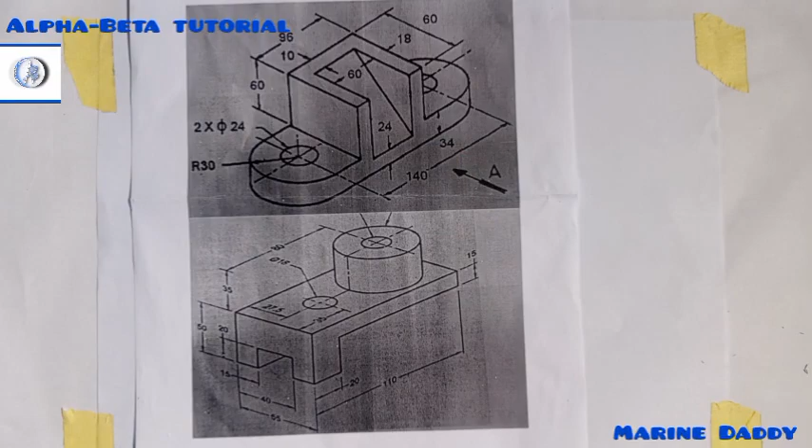Alright, now this is another question among your assignments. They ask you guys to draw the isometric drawing of this diagram, so I'll be guiding you through on how to construct them.

Let's go. First thing you need to do: isometric drawing is a kind of drawing drawn at an angle of 30 degrees to the horizontal, isn't it? So we'll draw our vertical and horizontal lines. This is my vertical, this is my horizontal line, and this is my vertical line.

That's what I normally teach my students. I have my 8 and my 10. If you want to draw a perpendicular line, balance the horizontal or the vertical as the case may be to fit in this extended part of the 8 in inches and the 10 in millimeter or centimeter rather. Balance it in this manner, then you draw.

So at this place I'm having my vertical line. What I'll do is project up, right? I'll go from this side and draw my slanted lines. They said it's drawn at an angle of 30 degrees to the horizontal.

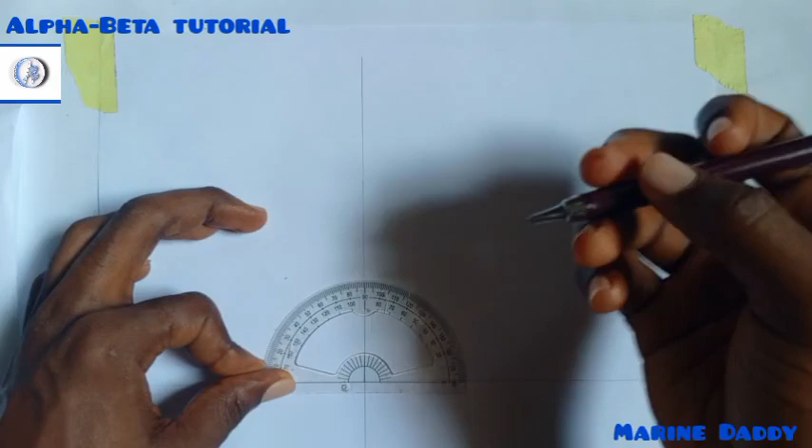So I'll get my 30 degrees. You can use your set square to get it, but I am very much comfortable with this one. So welcome to the party if you love this. I'll project out. Same thing applies to this side, I'm projecting out.

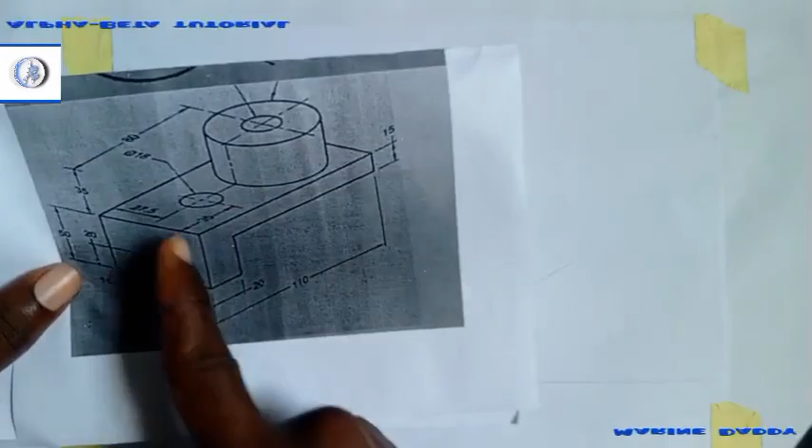Once I'm done with this, I can now start my construction. Isometric drawing gives you the opportunity to start from any part of the diagram. The choice is yours. I can choose to start from here and end up getting the diagram, or start here, whichever way is convenient for you. But I usually recommend you start from the bottom, the ending part, then move upwards.

You understand? So let's go from this part. I have this part of the diagram going like this. The total is 55, so this is what I'll do to get speed. I'll measure 55, so this is 55 here. Indicate 55 there.

I also have 15 millimeter at this side, so I'll measure 15 here. Here to here is 15, here to here is also 15, I guess. So I'll measure 15 here. This is also 15, you understand?

So the next thing I'll do is draw a straight line. Balance 8 and 10, then project it out. You can also use this one, you can also use this.

When I was teaching isometric drawing, I taught them how to use different means to get your lines. So you can also use this. You want to transfer this part of the stuff out to this one. All you have to do is balance it like this.

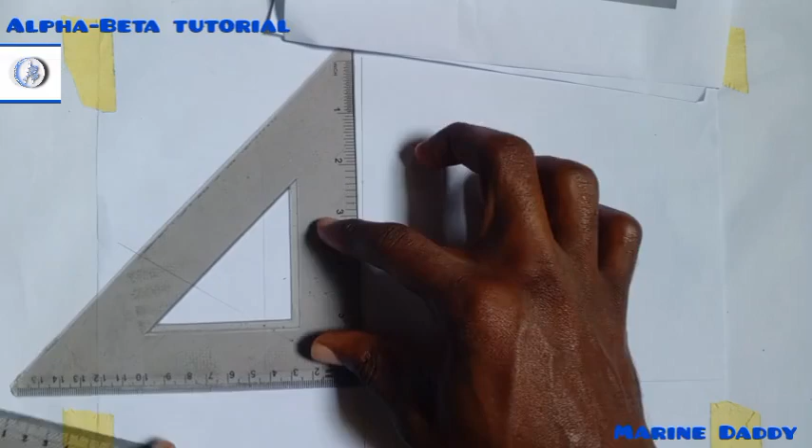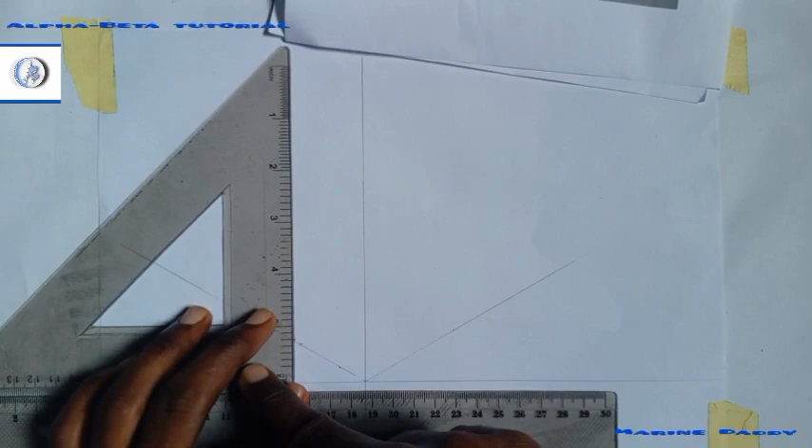Once you balance it like this, you can now move. As you can see, I arrived at the actual part, right? You can come to this side, I'll do the same thing. Come to this side, so I'll do the same thing. Right? So the choice is yours.

You can pick any one that is convenient for you, but I don't like spending time with these two, it slows me down. So I can just balance my 8 and 10 and work with it. So let's go.

Now, looking at this diagram, I have height from here to here, which is 50. I'll come here and indicate 50 here. Please, you can go and check out the videos to help you.

From here to here, I have 20. The diagram here to here is 20, so I will indicate 20 here too. Please come to this side and repeat the same process.

50 here, 20 here. Next thing I do is connect it and project out. Same thing applies to this, project out.

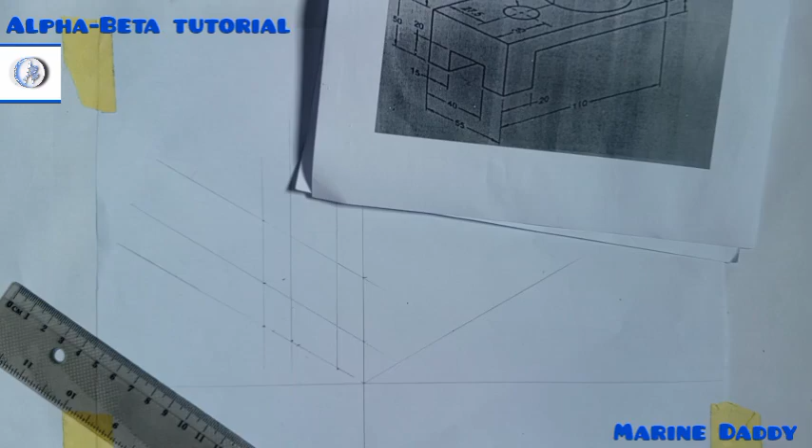So once I'm done with this, please pardon me, I'm having issues with my health actually, so my voice might not be audible enough, but I'll try my best actually.

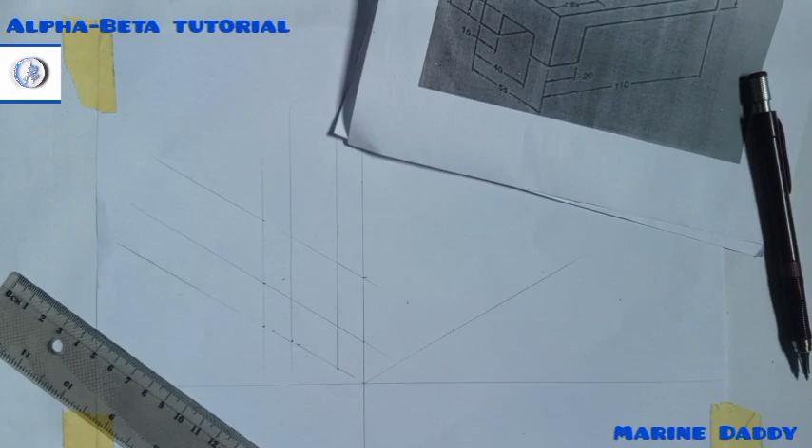So now that I have done this part, and you are sure that this side is actually correct, you can outline. For the sake of visibility, I'll make use of pen, blue and red pen. But normally, what you are supposed to use is your 2B pencil, or a thicker pencil that will enable you to show the work in a well outlined manner.

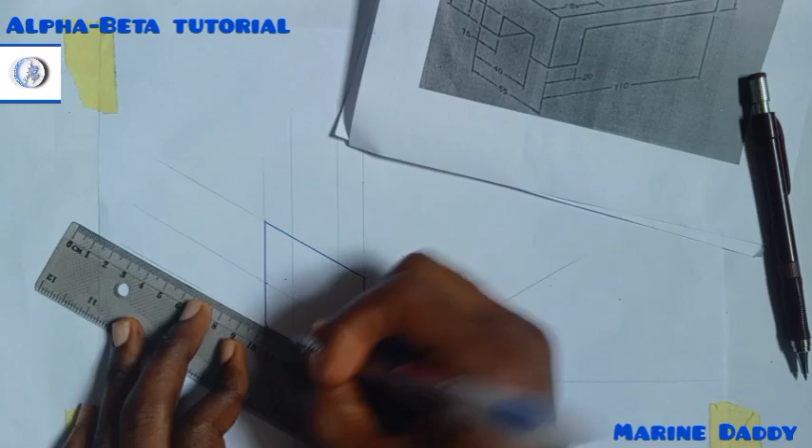I'll do it like this. So please don't use pen, no. You go use pen, don't say it's MD. You saw it in MD's video.

So I've done that part. Next thing I'm going to do is come to this other side, right? On this side of the diagram, I'm having 20 here, so I will indicate 20 at this side.

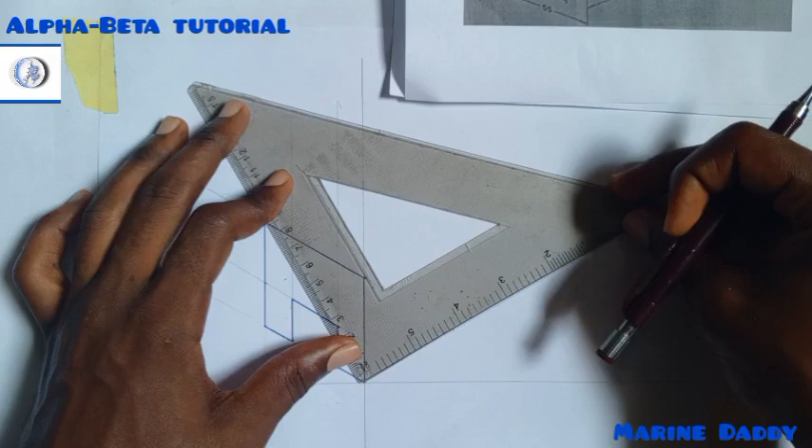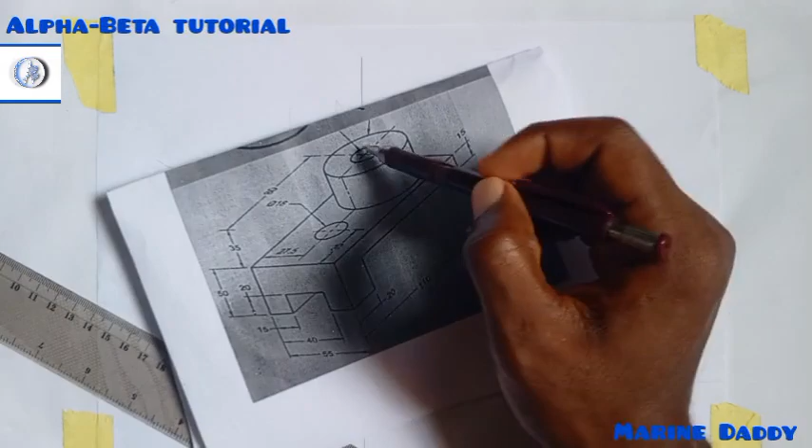Put the ruler in this manner, then take it up to this side. Project it out. Now the total length from here to this side is not given, but they gave us from this part of the diagram to this part to be 80. Now they gave us the diameter of this diagram.

Now once you are done with this part of the diagram, you can come over to this side. Isometric drawing gives you the opportunity to start from anywhere, so if you see that you are confused in a particular part, you can leave that side and go to the next place. So I'm moving over to the right side of this thing.

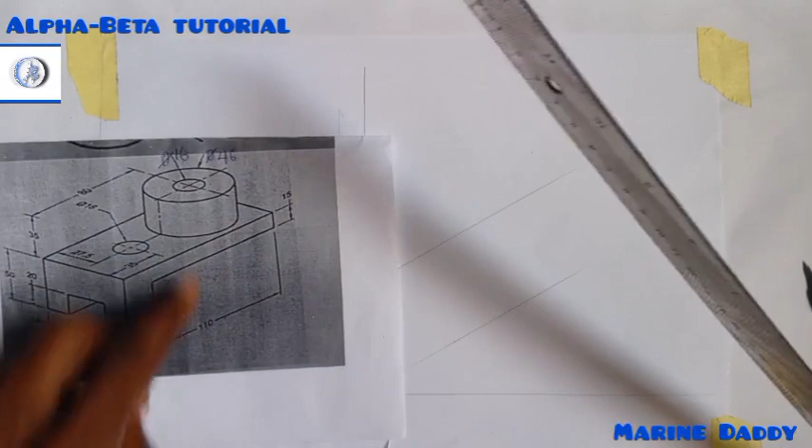Now I will measure the total from this place to this place, given to us as 110 millimeter. Here to here, 20. So I'll measure 110 and I'll measure 20 here. So this is my 20 here. Then I will now measure 110, that's 11 centimeter. I'll do the same thing here.

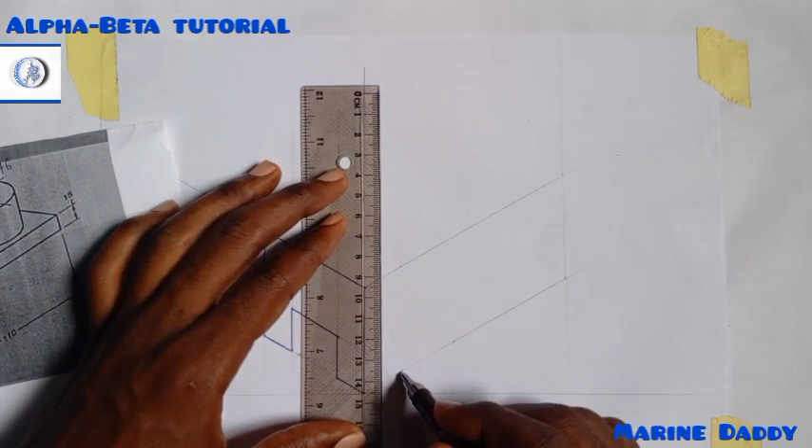I want to draw a straight line, and in my primary school they told me that the shortest distance between two points is a straight line, so I'll repeat the same process. So from here I'll draw a straight line. Now draw a straight line, do the same thing here, straight line. Now let's go.

They said this side of the diagram, here to here, it's 15, so I'll measure 15 here. Here to here 15, here to here 15.

Then I will draw. Always project, it's very important you project. Is it 15 or 10 they asked us to use? Okay, I'll use 10 instead of 15.

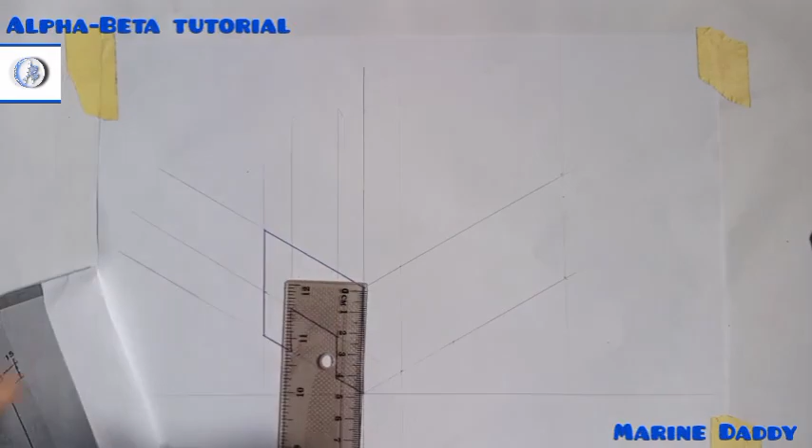Okay, after doing this part, from here to here, from our diagram, they said here to here is 15. So I'm measuring here to here 15. Now do the same process, here to here 15. So I'm connecting both of them together. Always project, it's very important.

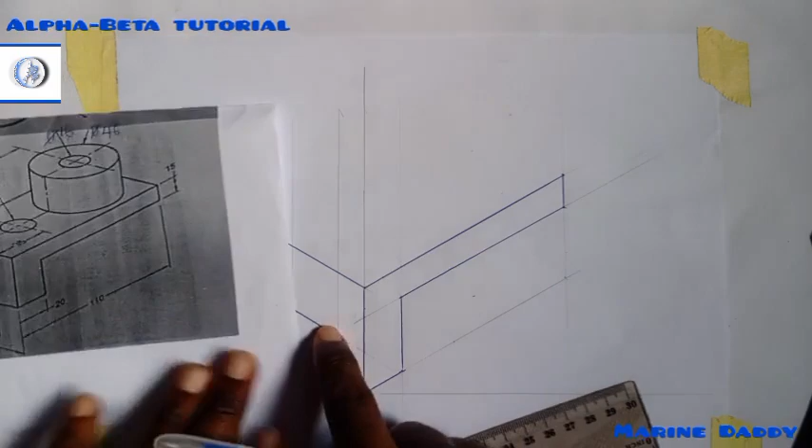So once I'm done, I can outline this side, and this side of the diagram. Please, this is for the sake of audibility, or visibility rather, that's why I'm doing this. Please don't use biro to draw. Okay, now the next thing I need to do, let me just close up this part. I'm having this here, so I need to indicate it here.

30 degrees to the horizontal, so I'll copy this one here. I'll copy it here. You don't just draw any slanted line, you copy it. So copy it, this is where it's located, and I'll draw it. I'm done with this side.

Now the next thing I have to do is to take care of the parts at the top. Now for me, I'm taking this to this side. This one, I'm taking it to this side. This side should be parallel to this, since they are 30 degrees to the horizontal, so I'll balance it like this.

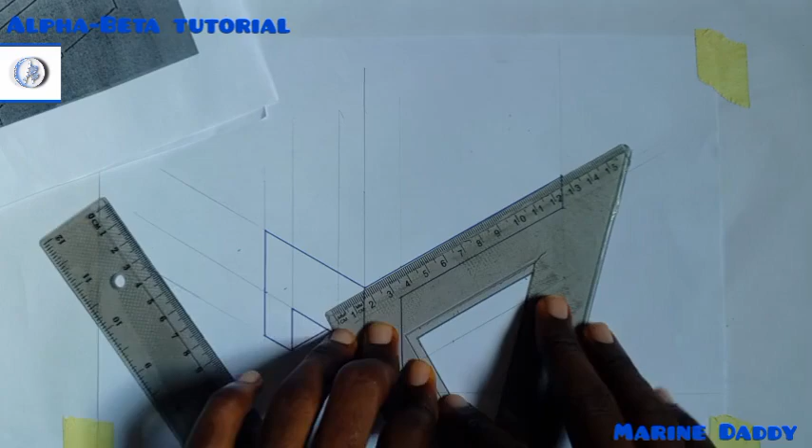Balance it like this to project.

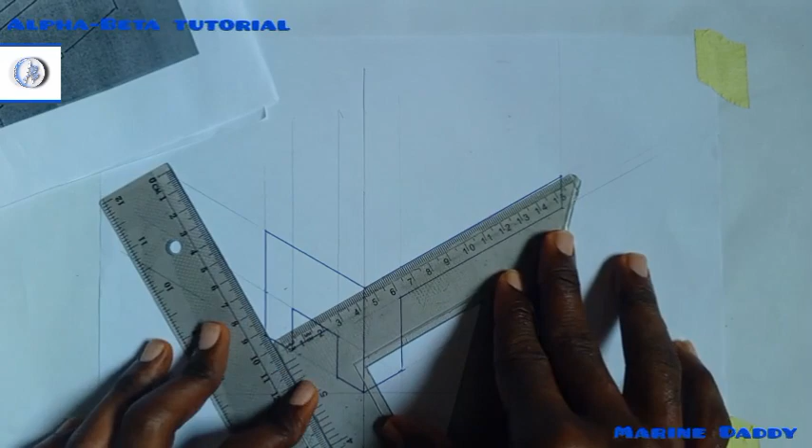If you've done it like this, you have to start measuring 30 degrees. Same thing applies to this side, I'll do the same thing here. So this side, I'm transferring it to this side because it's supposed to be parallel.

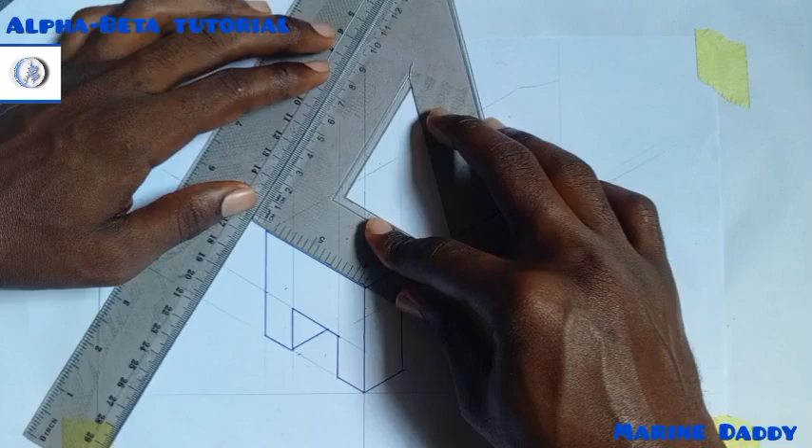If you don't want to do it like this, there are other ways for you to achieve it. So here it needs to be parallel with this, so I'm transferring it to this side. So draw.

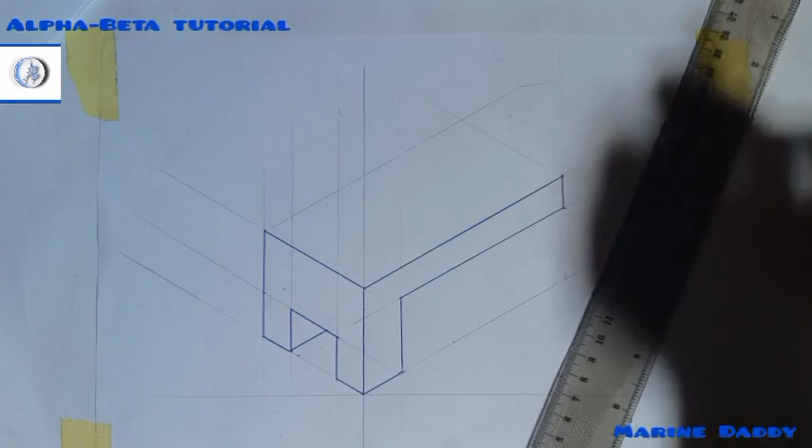Now instead of doing it like that, you can do it another way to minimize the usage of this. Since here to here is 110, then here to here should be 110. All you have to do is, when you draw a straight line, just measure 110, and you see I'm having 110 here. So that's the way to reduce the usage of that set square.

Now once we are done with this part, the next thing we need to take care of is the circular part at the top of the diagram. They give us the dimensions in diameter and radius, so we need to take care of them, and most especially their position at the top of this place.

So now let's go. In this diagram, if you look closely, from the center to this wall is given to us to be 35. Then from this same center to the other wall is given to us as 27.5. So I'll take care of that. Now this is what I'll do.

Watch closely, I want to get the location. Please, location is very important. Now from here to here, I'll measure 27.5. 25, 26, 27.5. Do the same thing here, 27.5. Once I'm done with that, I will draw a line.

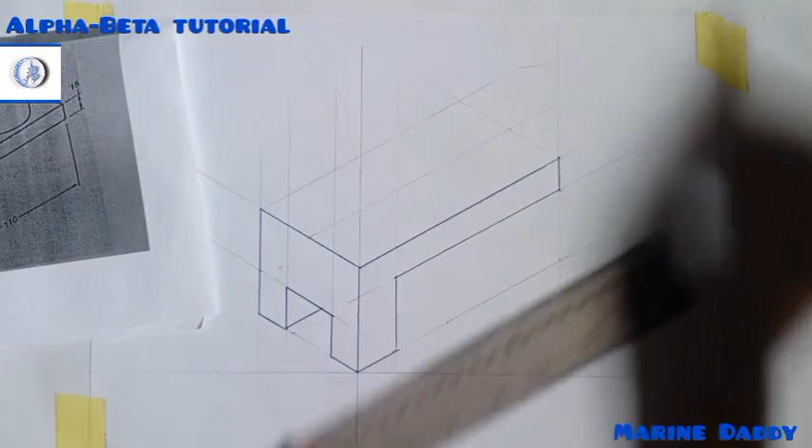Now they also told us that from this wall to the center is given to us as 35, so I'll measure 35 also. So 35 is at this side of the diagram.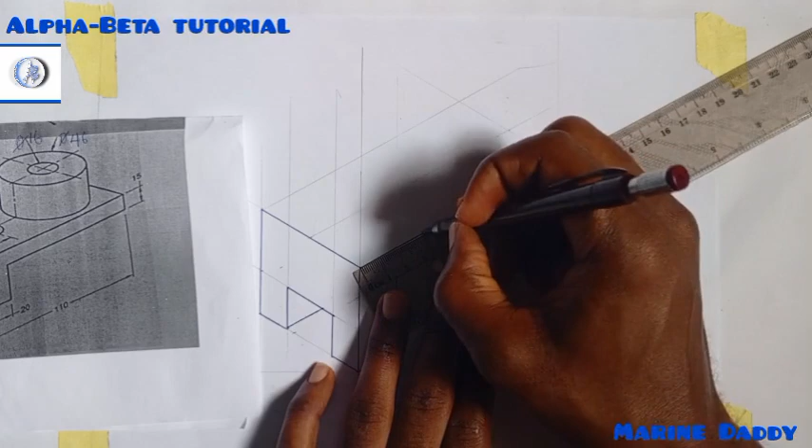35. Then here to 35. Once I'm done, I draw. Automatically this side becomes the center of my circle, so I have to create an isocircle at that place.

If you see that your work is getting too rough, you can clean off some parts, but not your whole construction. Please take note of that. So let's go from this center that we have gotten.

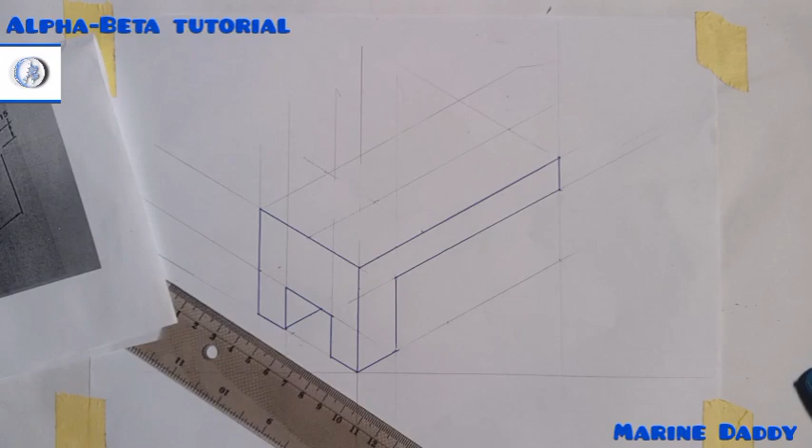We need to place the isocircle. You can watch my video to see how to construct isocircles, please, so I won't be wasting time there.

The isocircle, they tell us it's 16, diameter of 16. So this means I'll measure 16, that's from the center. I'll measure 8 to the right, 8 to the left, which gives me this 8 here, 8 here.

Repeat the same process here. I'm having 8 to the right, 8 to the right, and 8 to the left.

Once I'm done with that, I'll create a box. Not actually a box, a cube. So I'm balancing the cube. I gave you the different methods to do it, so pick your poison.

Just pick the one that is convenient for you, not actually your poison, please. Then this side, so same thing applies to this side. This and this.

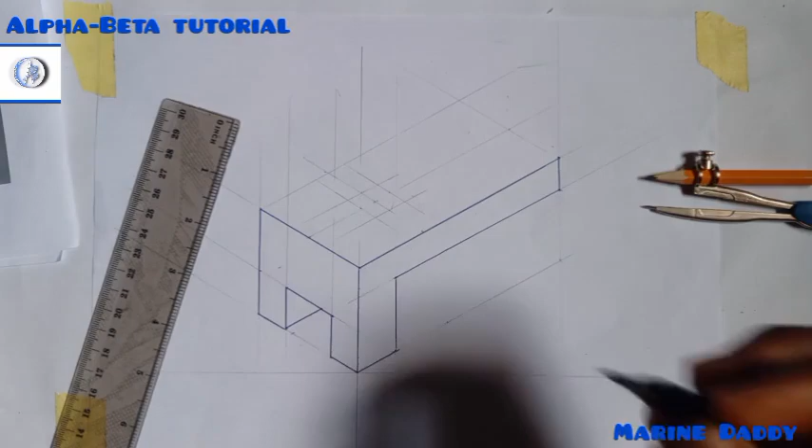After doing this, creating a parallelogram here. So what you have to do is this. From this top, I explained this in my previous videos. Go and check on how to construct isocircles, please.

So this place to this place to this. Reverse it. This.

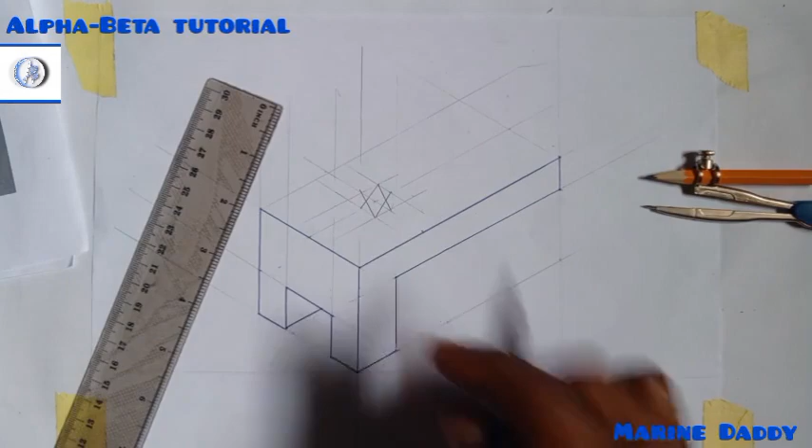Once you are done, you can now construct. This one comes from this side to this side. You can see. So this from here to this place, this side.

Then I'll repeat the same process here. You can see it's connecting to this side. Now for this part, I'll place the compass here. Then this one in this manner.

So after doing this and this, you end up having the iso circles. Based on what I've done, this is actually the way of constructing the isocircles.

This video is strictly based on your assignment, doing it for you, then guiding you through it, but not explaining some of the details in full. Please, if you want to understand how to construct an isocircle, locate the video. It should be among the rest of them. Then you can understand it and know how to do it.

Now, once I'm done, for the sake of learning again, I'll be using this to outline it with pen. So locate where I'm having my dimension, the actual one. I'm using this, I'll still repeat myself for the sake of learning.

For the sake of learning, I'll be using this. If you can get your hands on things like this, it helps you in your TD. It gives you speed and accuracy.

With this, I don't have to construct this isocircle, I just need to locate it. You can still approximate to get any of this circle and it will still work out for you.

Check out the videos where I did this, please take note of that. All right, let's go over to this other one.

So for this one, I'm having the circle, something like a cylinder located around here, so I'll need to construct it.

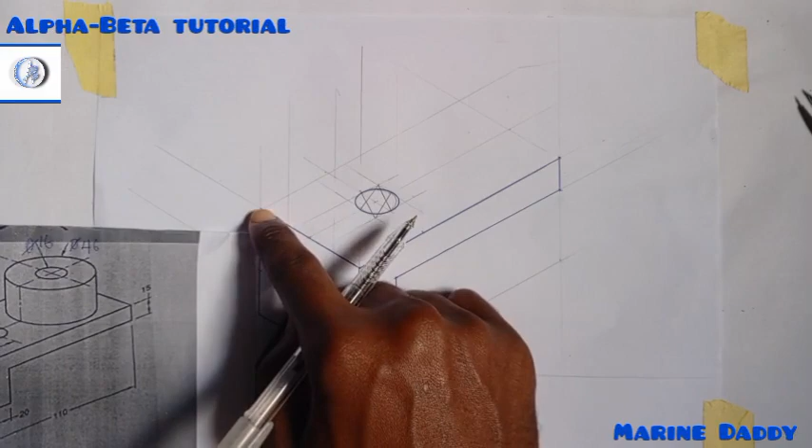And they told us that the center, from the center of the circle to this end here, they told us that it is 80 millimeters. See it, from this side to this side to the end, from the center to the end of this place is 80 millimeter.

So now what I need to do is construct it here. I'll locate my 80 millimeter. They say it's 80 from this place to the center. Say it's 80. Let's do the same process here to get a straight line.

Can you actually use your set square? Oh, I like working with only my ruler, it gives me speed. Now this place I'll just draw it here.

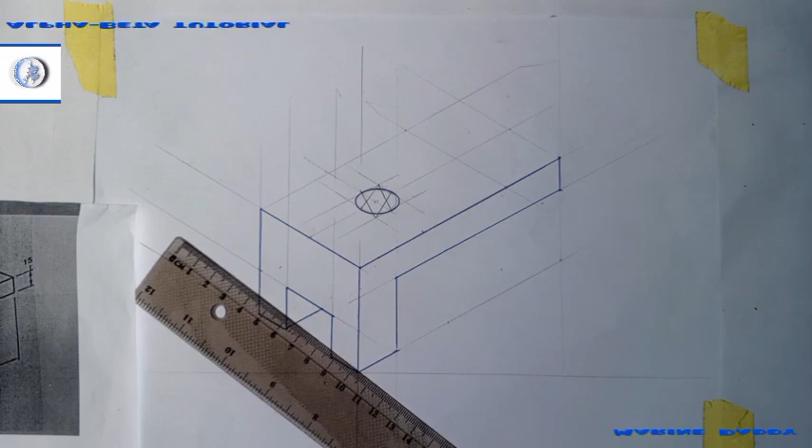When I draw it, if you look closely, you realize that this center you used on this side is equal to the center here, which means it's a straight line that passes through the center of this down to the center of this.

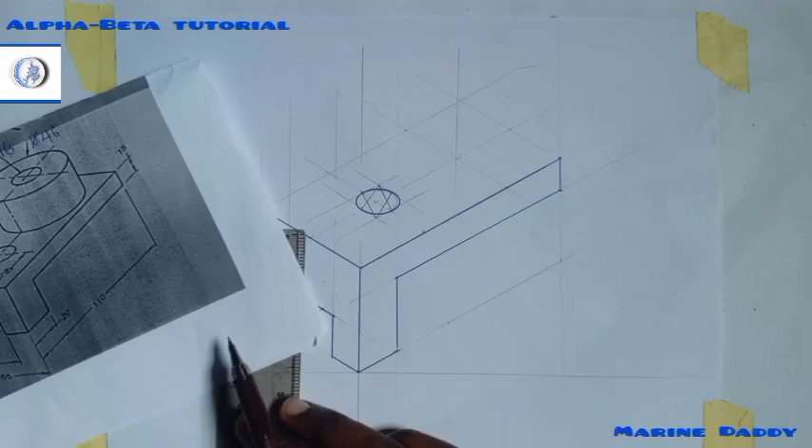This place, you understand? So now from this center we have gotten, I will draw the base of this structure here, I'll draw it around here. And they told me that the diameter of this you are seeing here, both the one for up and the down, is 46 diameter. So again, I'll measure 46 diameter.

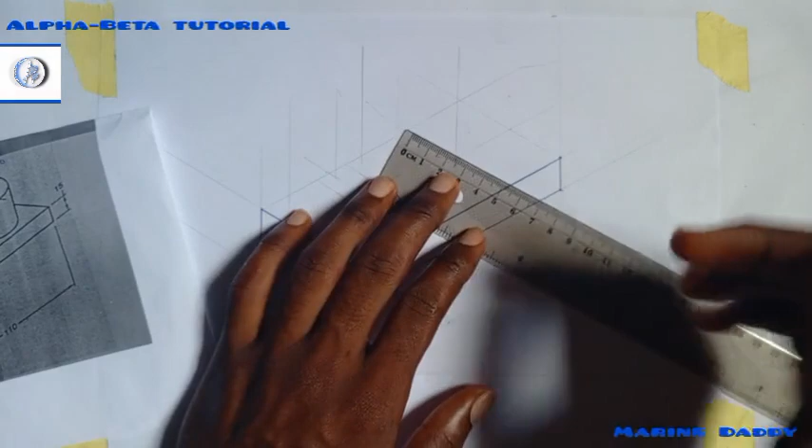That's 23 to the right, 23 to the left, 23 to the right, 23 to the left. So I'm having 46 here. Repeat the same process here.

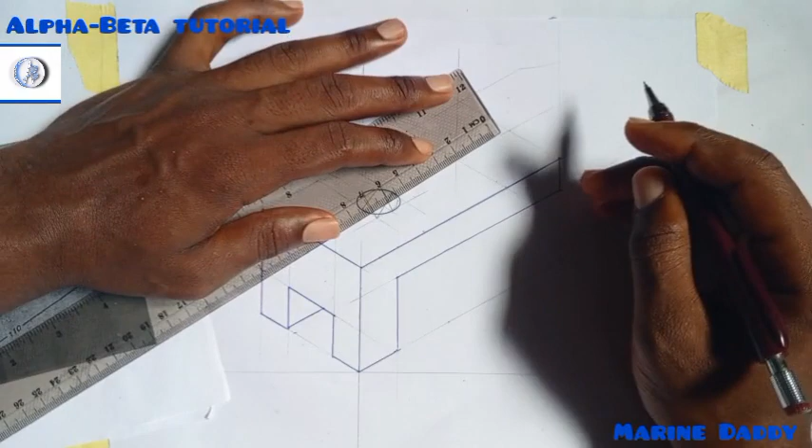So once I'm done with this, I can use my 45 degree, my 30 degree set square, transfer this length to this and to the other side. But I don't want to pass through those stress.

Normally, if you work on that, your work will be actually accurate. For the sake of learning, let's go, I'll do this here too.

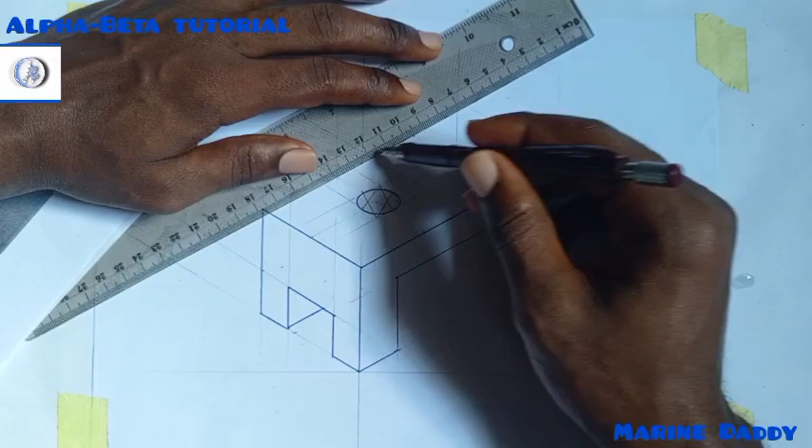Same thing here. So again, I'll repeat the same process from this side to this side to this side. Then this side, I'll take it to this side. Same thing applies to this to this.

So the next thing I will now do is use my compass or my pencil to draw. From this place, I'm taking it to this side. Okay, that's it. Then I'll do the same thing here.

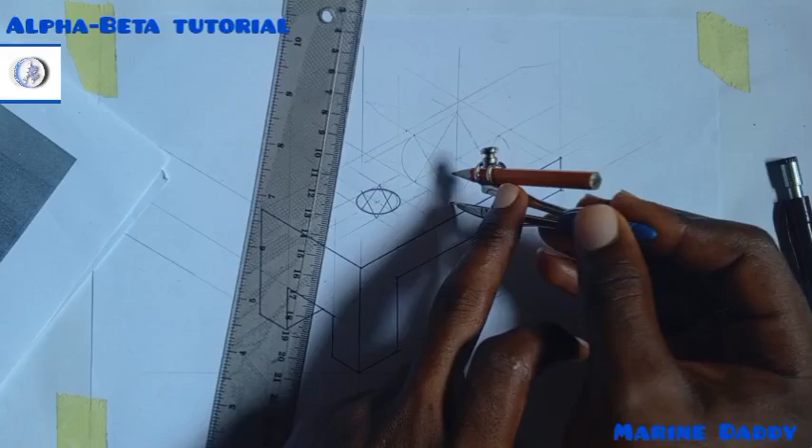Now once I'm done with this, I'll take this part also to this side, transfer it to this other side. Check out my videos to see how to do it. This one to this side, this one to this side. But I won't be needing this side since here is hidden, and this other side is hidden too. I just wanted to use that as an example to show you.

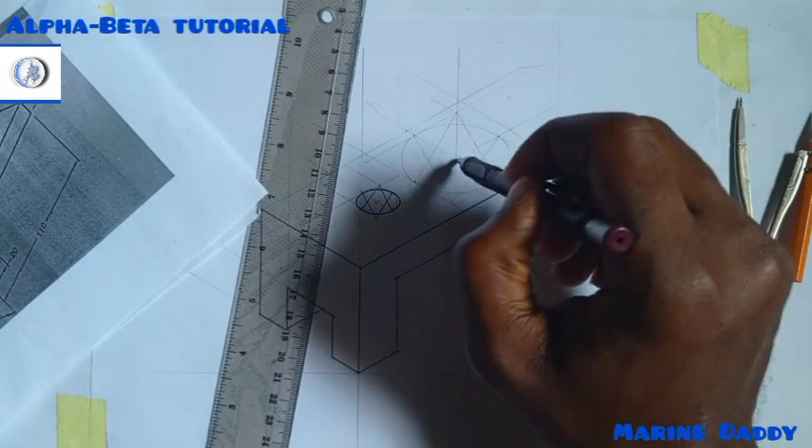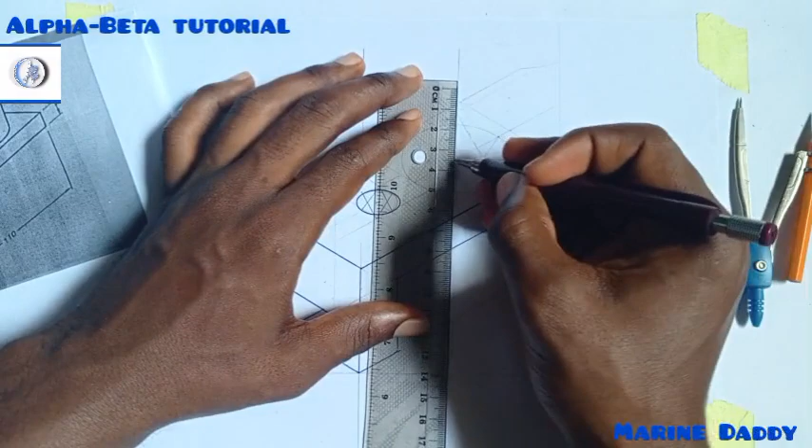All right, now from this center, that's why I'm drawing this. I will need to extend my hand above where I'll draw the one at the top, and they said the size, the height from here to here is 35. This was where they showed us the height from here to here, 35. I knew it from this place. Since here to here is the center, automatically here to here is the 35, which is the height of this structure. So I'll measure 35 from the center, 35 to the top.

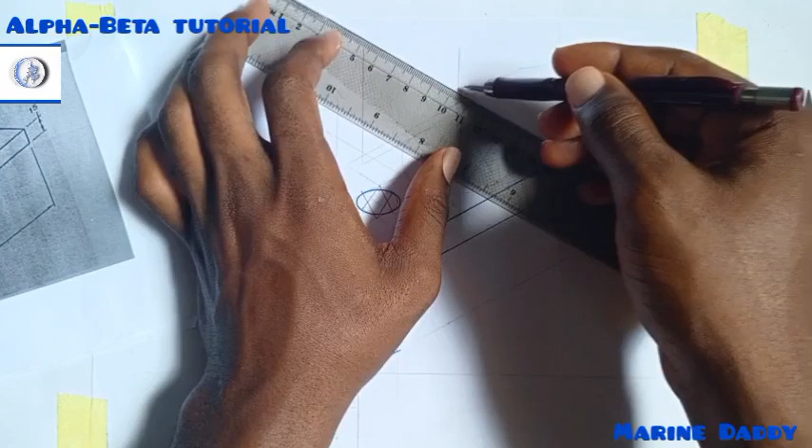I'll measure it to the top. Now once you are done with this, you will still repeat the same process. Draw another line this manner. You can transfer any of this length. So I choose to transfer this.

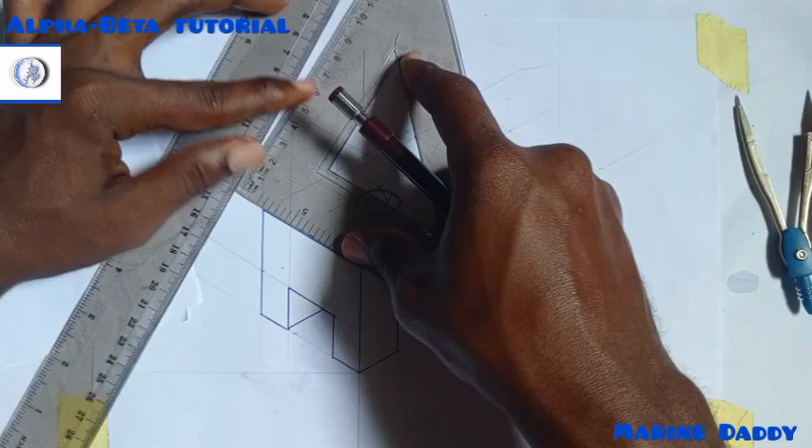Again, if you realize that you are now drawing too many lines, you can clean the ones that are not too important so you can see space to work. So from this place, this is my center, and this is my line.

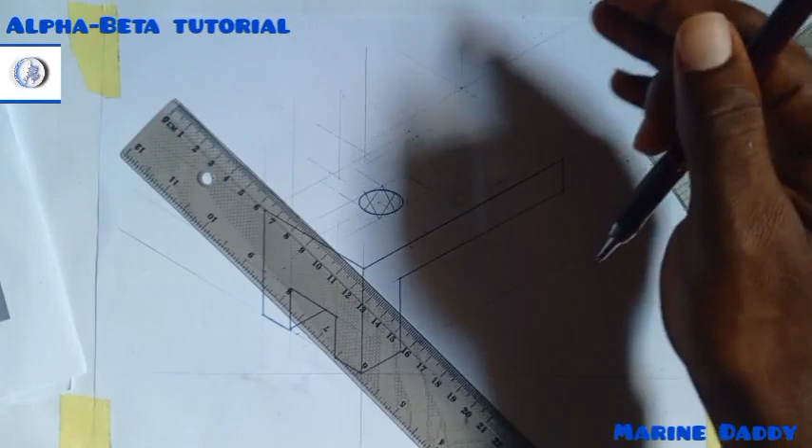I would also need the one going towards this direction, so I'll transfer this. Please, what I'm doing might be looking strange to you. That's because you have not seen the video. Please go to the video where I taught how to construct this. I cannot be teaching you here unless the video will be very long. Go see where I taught how to construct ISO circles.

So I haven't gotten this. I'll repeat the same process I did, right? They say it's 46, so 23 to the right, 23 to the left.

Okay, now this is what I'll be working with. Now at this part, this to this, this to this, and this to this. Again, I'll use this to work.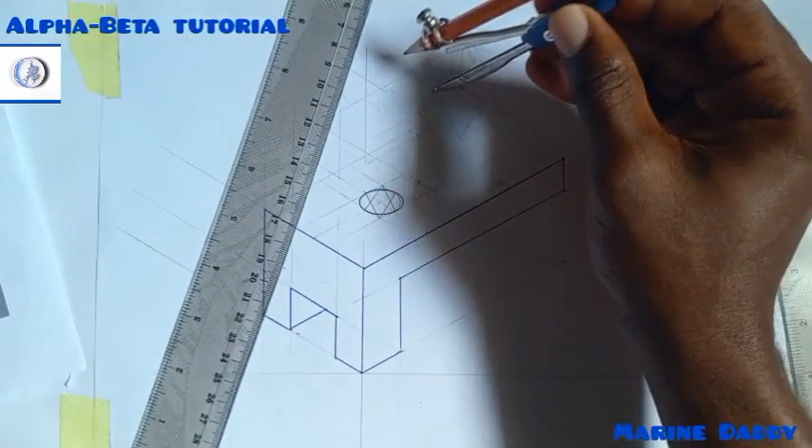Put my compass at this place, just as I did for this. I'll put it at this place, then I will draw. I'll put it at this place and draw. Come to this other side, repeat the same process.

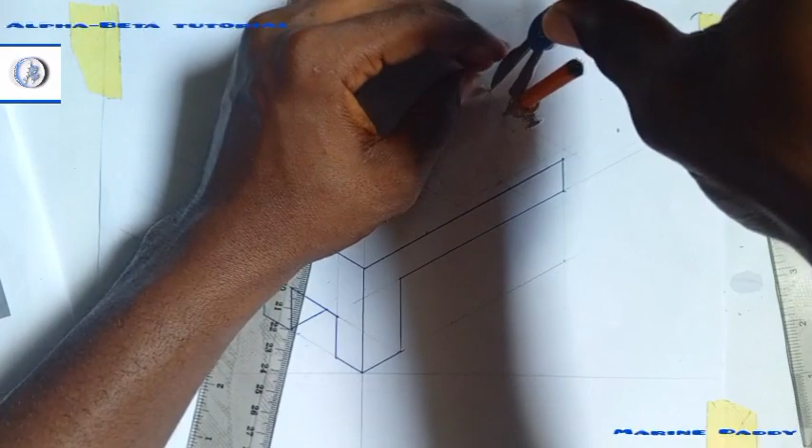Once I'm done with this, I'll do the one for this side. Then do the one for this side. I'll be able to see the full result now. For this one, I'll place it there again and repeat the same process. Now what I'll do...

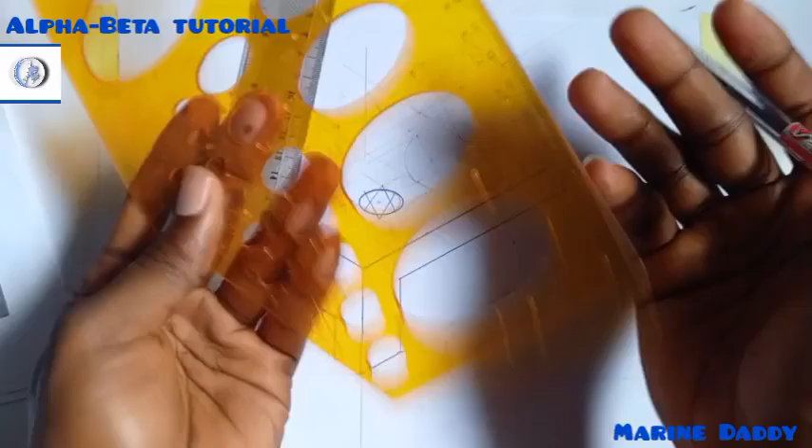To outline it, please use a 2B pen or HB, so it's going to be thick. This one will not be thick enough for you to show the outline of the diagram. As for me, I'll just use my shortcut to trace this. I just had to construct it so you know how to do it. Left for me in the exam or anywhere I find myself, as long as I have this, I can work. So I can also make videos for you on how to make use of this.

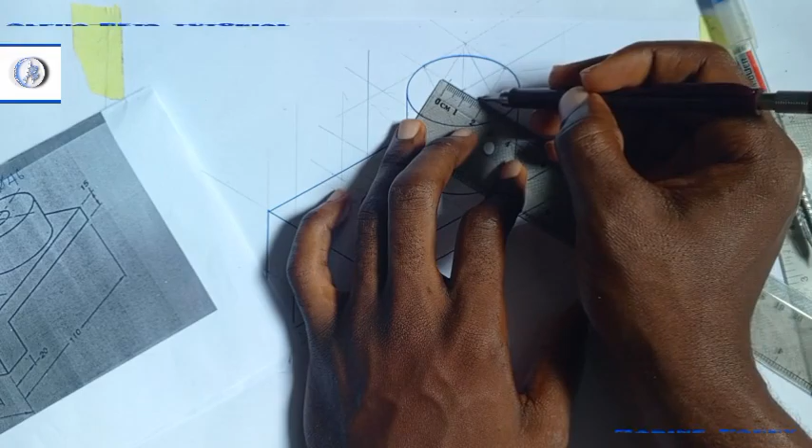Now once I'm done with this, the next thing I need to take note of is the other one at the center. Let me take note of this one at the center. Now this one they say is 16 diameter, so 8 to the right, 8 to the left, just as we have this one. So I go 8 to the right, 8 to the left.

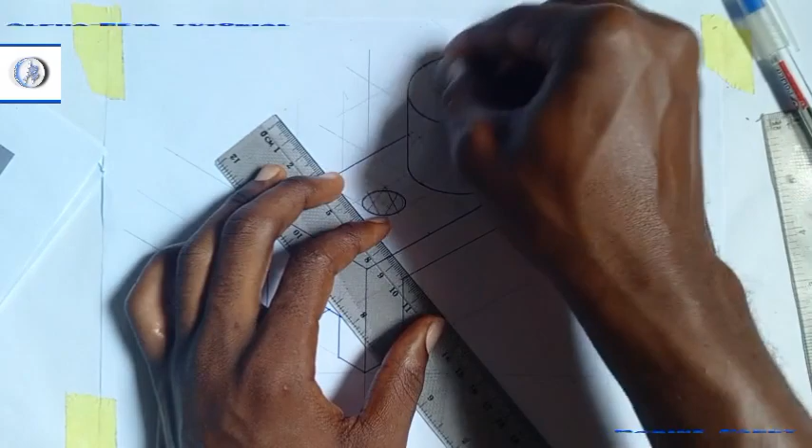Again, if you realize that there's a lot of construction at this side, you can still reduce it so you have space to draw what you want to draw.

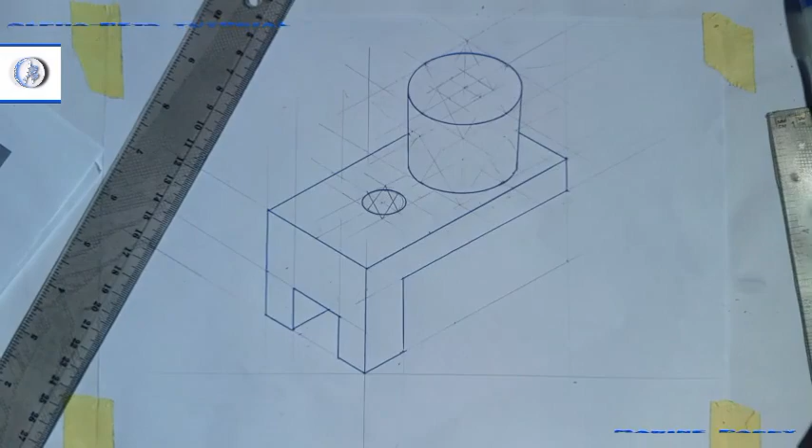Now with this, I can draw my ISO circle at that place. Let's take note of that as well. Now, but you know what to do now. This to this, this to this, this to this, this to this.

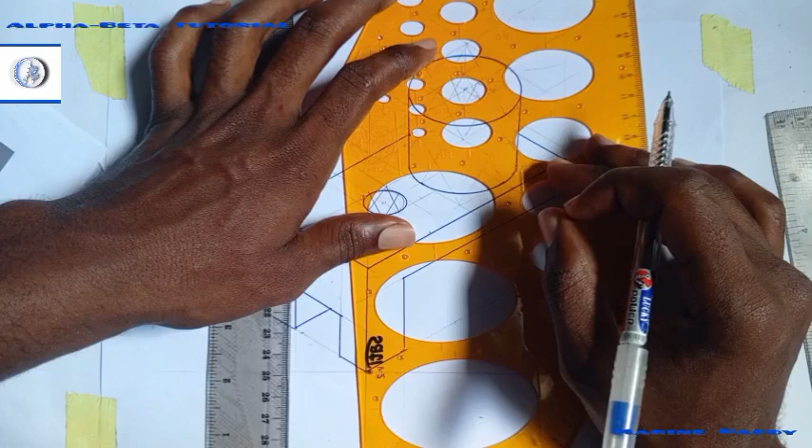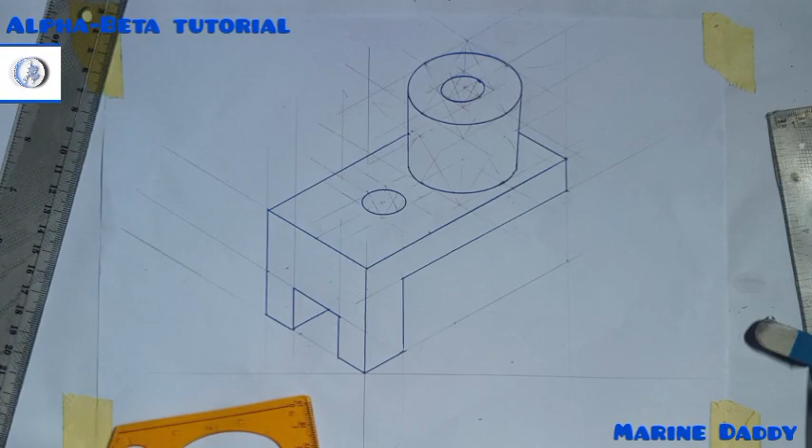Then you construct. You know what to do, but I'm not going to be passing through that stress now, so I'll just go straight to the point. Use my almighty formula. I'll just go straight to the point, use my almighty formula, and I'm done. So this is the diagram you were asked to construct. So the next thing I'm going to do now is to dimension my work.

Okay, so this is what was asked of you guys to construct. So we're done with this one. We need to pay attention to this other one now.